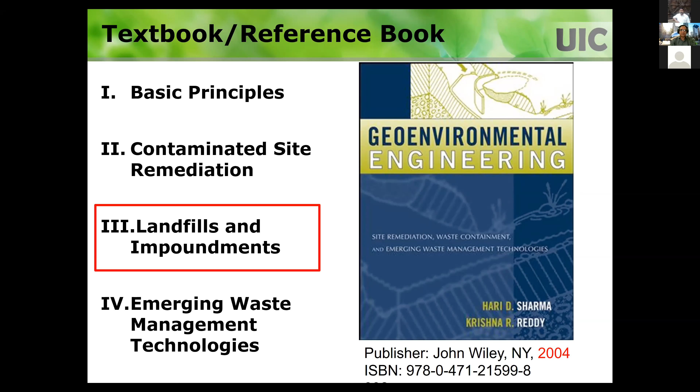Let me start with this textbook or reference book. I recommend everyone working in the landfill area to have this book. It has 4 parts, and the third part deals with landfills and impoundments, covering chapters on sources and characteristics of waste, landfill regulations, siting configurations, liner systems, leachate collection and removal systems, liner design, final cover systems, gas generation and management, groundwater monitoring, surface impoundments, beneficial use recycling, end use of closed landfills, and bioreactor landfills. These topics follow a logical sequence of how landfill design has to be conducted. I teach a graduate level class on design of landfills and impoundments, and I follow these chapters in the same order shown here. If you're interested in teaching a course, I recommend following this structure.

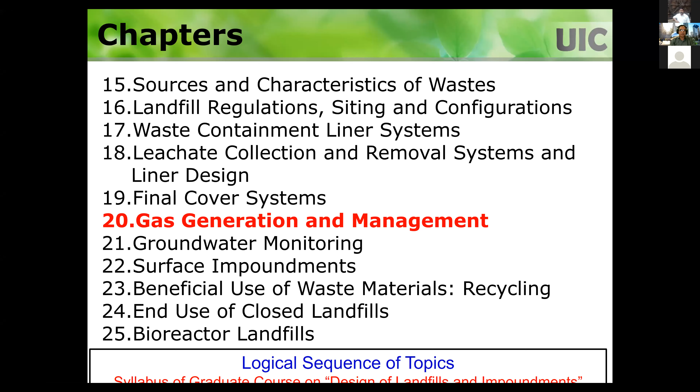In this lecture, I'm covering one particular topic: gas generation and management. If you want more details later, you can refer to chapter 20 in the book on landfill gas generation. So that's the topic today.

So why would gas get generated in a landfill? That's the basic question. Gas is generated because of the degradation of organic matter, the organic components in your waste. If you don't have organics, generally if you have inorganic waste, you don't see any gases generating. But since municipal solid waste contains organics, you're going to generate gas. This happens due to several mechanisms: evaporation and volatilization, chemical reactions, and biological decomposition. Of these three mechanisms, biological decomposition is the most dominant mechanism by which landfill gas is generated.

One has to understand what organic components are in municipal solid waste, because that dictates how much gas you're going to generate and at what rate. So you need a proper understanding of organic components in your MSW. For example, in the US, there's a lot of information from US EPA showing the composition of municipal solid waste—all the different components. You can look at the degradable components: paper, food, yard trimmings, wood to some extent, and plastics to some extent. If you sum them up, that gives you the organic content that has the potential to degrade.

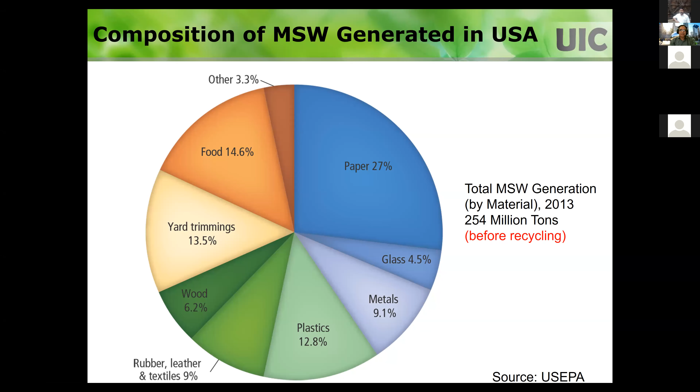But this is the municipal solid waste generated before even recycling. Once it's generated, you do recycling, composting, and take out waste for different management purposes. What we're concerned with, in the case of landfills, is the composition of the waste that is actually going to the landfill. That's the most important thing to look at—it's not about the MSW that is generated, but the MSW that actually gets to the landfill.

So the best way to know the composition of municipal solid waste going to the landfill is to do an investigation. You can collect a sample of fresh waste coming to the landfill to be disposed of. And if you want to know the composition at different locations and depths, you can drill and collect samples at various locations to look at the composition. We did this kind of investigation in our past research projects—this is a project you can see in the picture, done in 2006, many years ago.

This was done at Orchard Hills Bioreactor Landfill. It's really close to Chicago.

We went to a landfill and got samples of the fresh waste coming to the landfill, and then we drilled at different locations at different depths and collected samples, as you see in these pictures. This waste has been at some of these locations for some time. We wanted to know what the fresh waste composition is, and what the waste composition is at different locations and different depths.

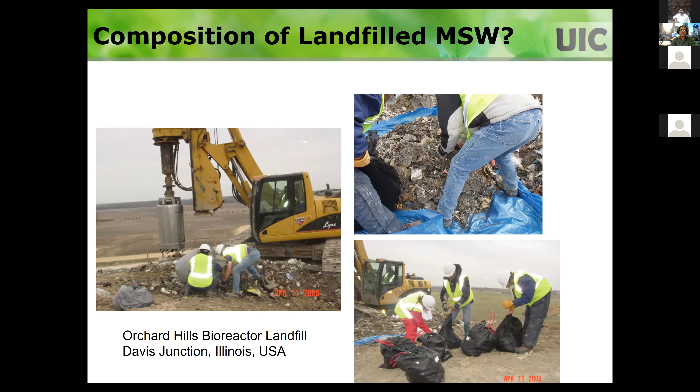So the collected waste, we wanted to know the composition of it. At each location we get a lot of bags of samples, because you need a large amount of material to represent the municipal solid waste. It's not like soil, it's highly heterogeneous. So you get a lot of sample, spread it on the tarp, quarter it, mix it, homogenize it, and take a quarter of the sample.

Then we use sieves, because we want to know the size distribution—not a typical soil grain size distribution, but three big size sieves. We put them on top, and whatever is larger than that size retains on that one, finer goes into the second one, and then the third one. So there are three sieves.

The idea is we look at what is retained on each sieve, and look at each component in it. We have 18 different categories of components, with boxes set aside with labels. We literally look at each piece, figure out what it is—let's say it's plastic or glass—and put it in the corresponding bucket.

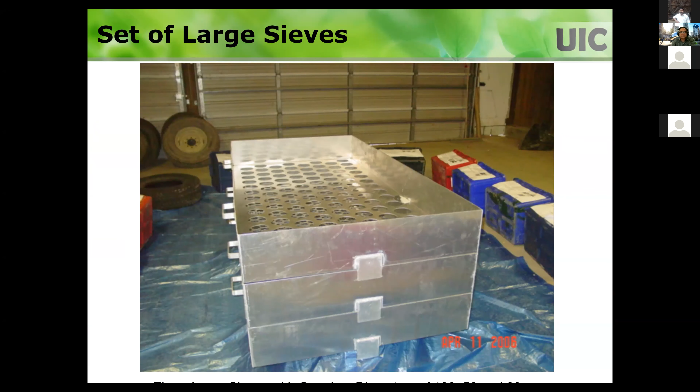So these are the three sieves. This is the large size, with openings of 100 millimeters, 50 millimeters, and 20 millimeters.

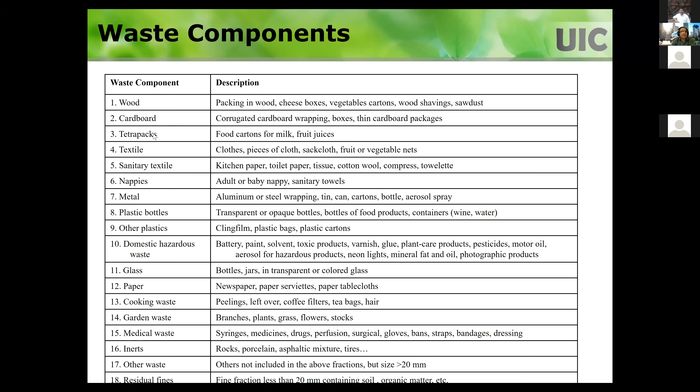These are the different waste categories, the waste components we designated—18 different components, each with a bit of description of what they are. We literally look at each piece in the sieve and put it into the 18 small buckets on the side.

After you do that, you can do different calculations—distributions, total quantities, and all those things.

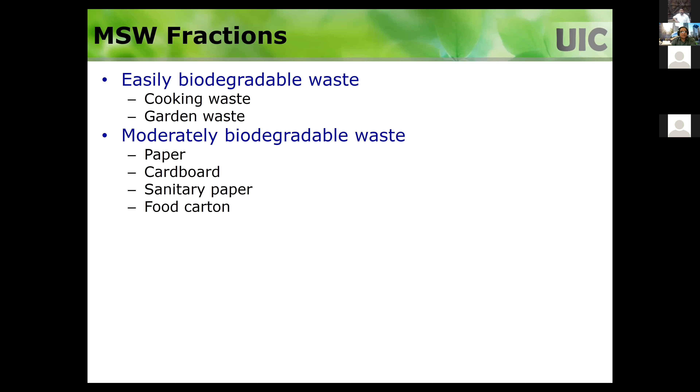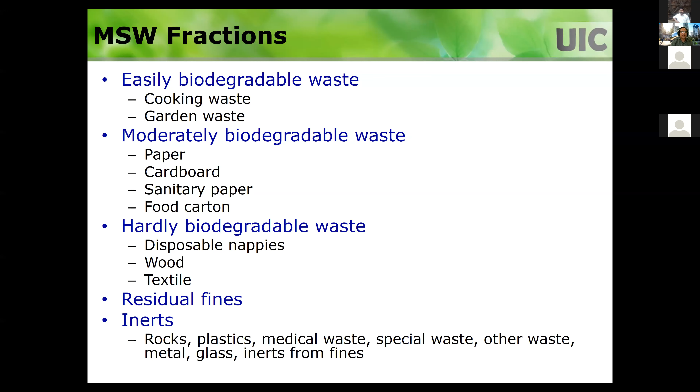For degradation purposes, remember, gas generation depends on how much your degradable fraction is. Not only that, you want to know how easily that organic material can be degraded. So we categorize these components into easily biodegradable waste—like cooking waste, garden waste, and these four components—moderately biodegradable waste, and hardly or difficult to biodegrade, which are three other components. Then we have residual fines, where you can't really distinguish different components, and inert materials. These are the ways you group components to look at the degradability of the waste, and as a result how much gas you're going to generate.

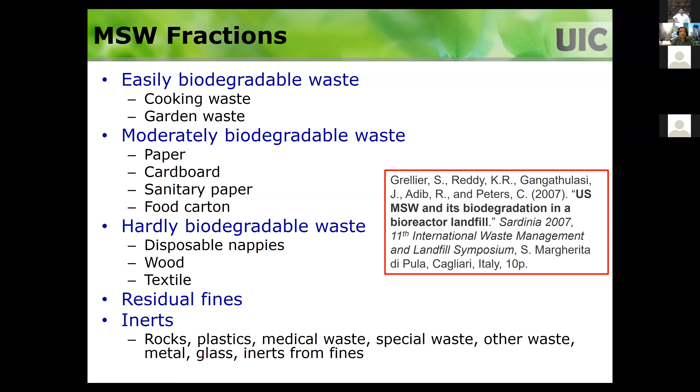So you can plot this—this is the paper that describes how we did this, and the results are also shown in it. Let's look at how the results look for fresh waste.

So this is the waste that came to the landfill for fresh disposal, right? It came for disposal. So when you do this analysis, you can look at how much is the...

Easily degradable fraction is only 6.9%. Moderately biodegradable fraction is 24.6%, and very difficult to degrade is 19.3%. Then you have inerts at 31%, and the residual fines, as I said, that could be degradable or maybe not, it's hard to know, but it's 18%. So you can see 31% is definitely inerts. This is all the other organic fraction that you're going to have in the waste.

Now, in terms of gas generation, you should know that this 6.9% is going to degrade very quickly, and that gas is going to come up. Then this moderately biodegradable fraction is going to start degrading, so that's going to take time. And then this difficult to biodegrade waste, that's going to take a longer time. So even though you have these different organic fractions in the waste, gas generation is a slow process because of these different biodegradable characteristic components.

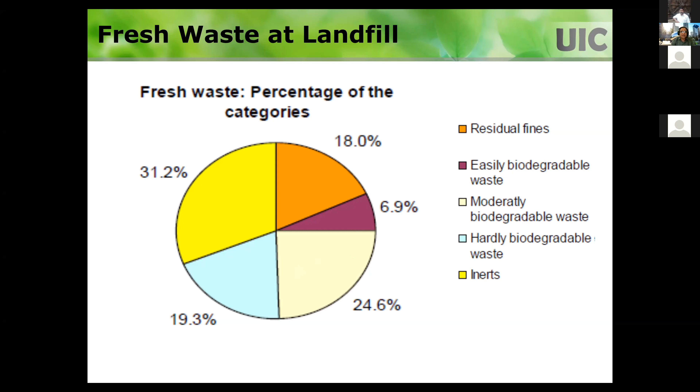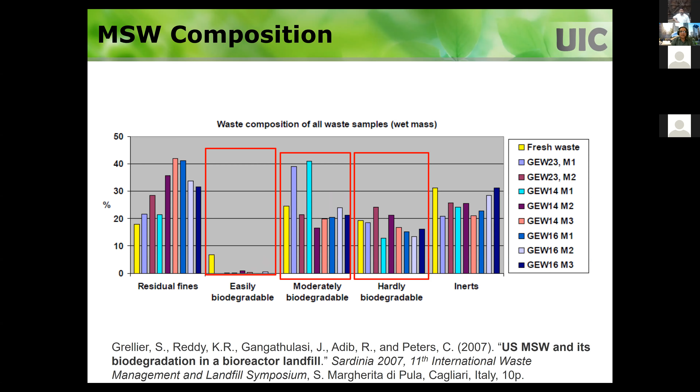But this easily biodegradable fraction, as you see initially how much you have, that's yellow, and the samples we collected from the landfill were there for a couple of years. So you can see everything got biodegraded. And then eventually this moderately biodegradable fraction is going to degrade. This is the landfill undergoing degradation, so it will take a long time for these moderately and hardly biodegradable fractions to degrade.

So a lot of times what happens is, if we conventionally look at loss on ignition as organic matter, you basically burn the waste at a certain higher temperature to burn off the organics. If you do that, you get whatever is the total percentage loss on ignition, but that's not going to give you a lot of detailed information.

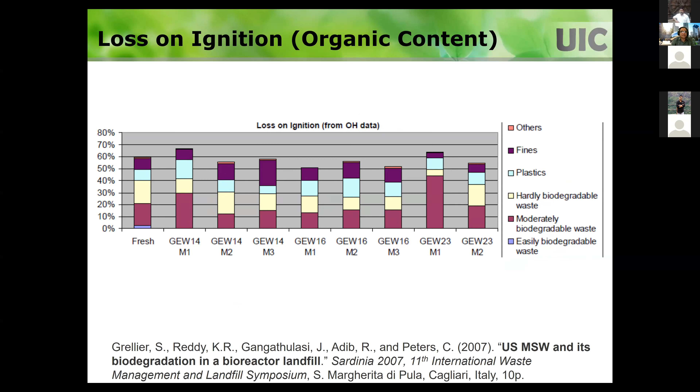So as you see here, subdividing that into easily biodegradable fraction, moderately biodegradable fraction, difficult to degrade fraction, plastics and fines, that gives you, even though you may have organics up to 60%, how much can be easily degraded, and how much is going to be difficult to degrade and takes time. So these kinds of analysis can help you.

So a lot of times, if you want to look at waste samples from a characteristics point of view, you need to have moisture content and loss on ignition. The one thing that geotechs don't commonly do is biochemical methane potential testing. It's very important to do this testing to determine the BMP, because that's the maximum methane potential, how many milliliters of methane you can get per gram of waste. That's very important if you want to understand the extent of gas that came out or has the potential to still evolve.

So those are the things, and you have percentage of fines, moisture content, and temperature. Those are things that you look at. So I'm showing here the fresh waste. As you see, this is the moisture content, and the yellow is the loss on ignition, this organic content you see. And then BMP is shown here, about 120 or 130 milliliters of methane per gram of waste. So that's the potential it has.

And then, when you have collected a waste sample from a landfill, you look at it and compare it with what the fresh waste is. This is the moisture content, so there's less moisture content compared to the fresh waste. And this yellow is the important thing, loss on ignition, you can see it's reduced. The most important thing is the BMP, you can see the BMP is very low. That means a lot of waste at this location got degraded. And then you can look at temperature and other things.

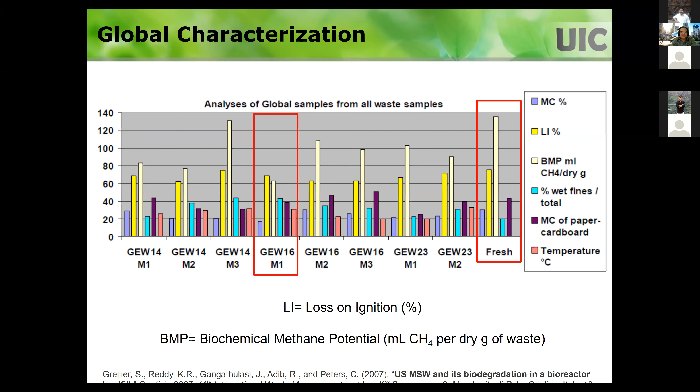So you can do a lot of detailed analysis on the waste samples to understand the gas generation in the landfill. As I mentioned, the mechanisms for gas generation are mostly biological decomposition.

Biological decomposition happens because you have bacteria that is naturally present in the waste, that can degrade the contamination, degrade the waste organic fraction, and that's how the waste degrades.

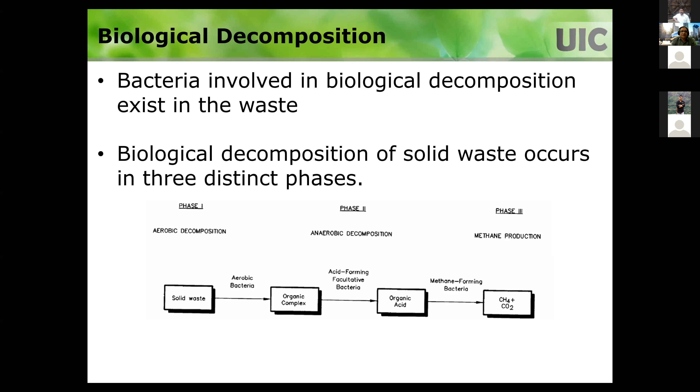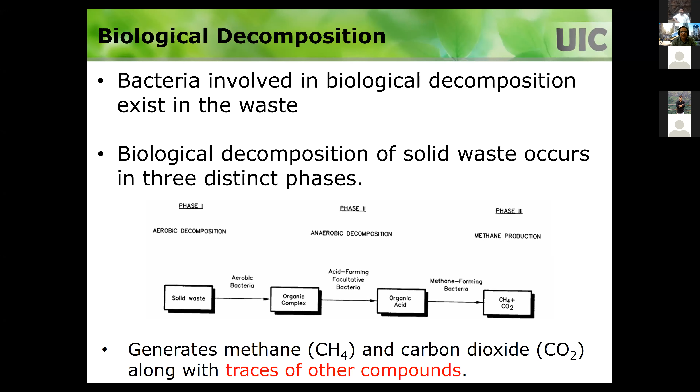Depending upon the literature, you will see there are 5 phases, 6 phases, but predominantly there are 3 phases. Initially you have aerobic decomposition, then anaerobic decomposition, and the third is methane production. There's a lot of literature on the degradation of municipal solid waste. Eventually, in phase 3, you generate methane and carbon dioxide in almost equal amounts, and you could also have trace amounts of other gaseous compounds.

So you will see charts like this one: phase 1 where you have aerobic degradation, then phase 2 and phase 3. I'm not going to spend too much time on this one. There's a more detailed description about these 3 different phases in the textbook, chapter 20.

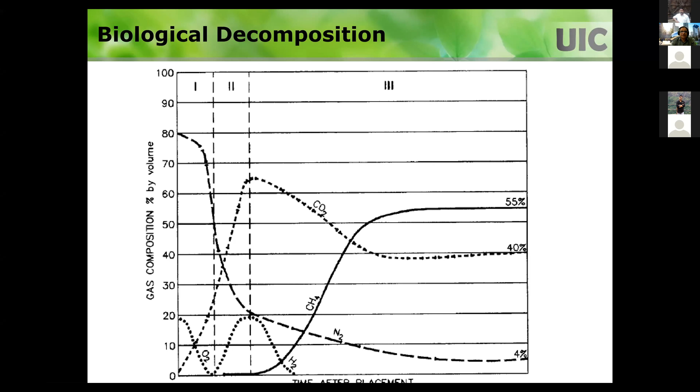Eventually, the first phase and the second phase happen really fast, and the third phase is going to continue for several years. The third phase is the one where methane, carbon dioxide, and other non-methane organic compounds are going to be present in the gas.

The factors that affect gas generation are the composition and age of the waste. If you have fresh waste, you're going to get a lot of gas, but if it's been in the landfill for a while, it has already produced some gas, so it may have a lower gas generation rate. In the composition analysis, if you have already exhausted the easily degradable fraction and the moderately degradable fraction, then you have a difficult-to-degrade fraction that's going to happen very slowly.

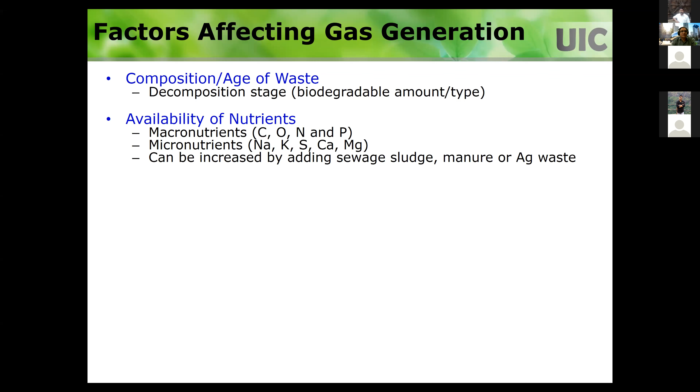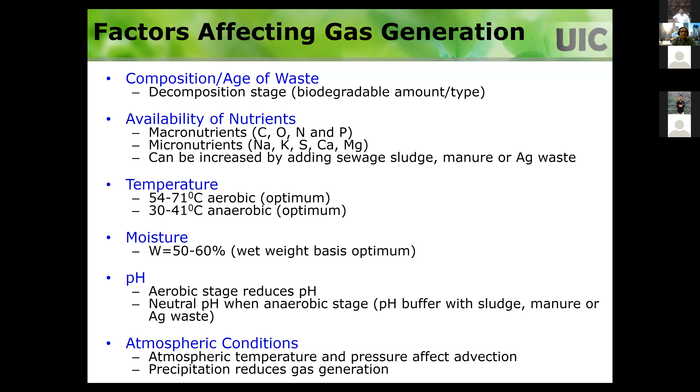When talking about biodegradation, those microbes should have sufficient nutrients. Also, the microbes should have optimal temperature, optimum moisture content, optimum pH, and optimal atmospheric conditions. That's why biodegradation and gas evolution really vary from location to location in a landfill because of these varying environmental conditions. So it's very important to control these conditions to favor degradation if you are hoping to get good degradation.

One thing we want to know about landfill gas, when dealing with landfill gases, is what is the gas composition and what is the gas production rate I'm going to get. So how much gas I'm going to produce, and what is the composition of it.

The best and most accurate way to know the specific gas composition is to install borehole probes, gas monitoring probes, or gas extraction wells in a landfill. Then you basically collect the gas sample and analyze the gas. That's the best scenario that you have.

So that's what a lot of people do. One second.

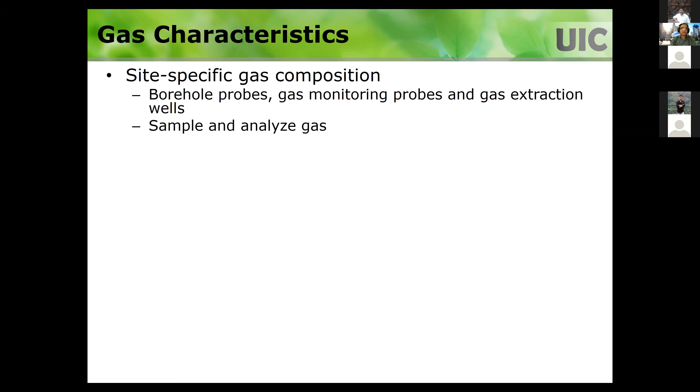So that's the best way, right? You just drill a hole, collect the sample, and then analyze it. When you analyze it, you are going to basically analyze for methane and carbon dioxide, because those are the dominant...

...byproducts of anaerobic degradation. One thing that is becoming extremely important these days is non-methane organic compounds. These have a huge potential for air pollution and could have huge health impacts. Also the physical characteristics of the gas that you generate are important. These are all things that you can determine once you get your sample.

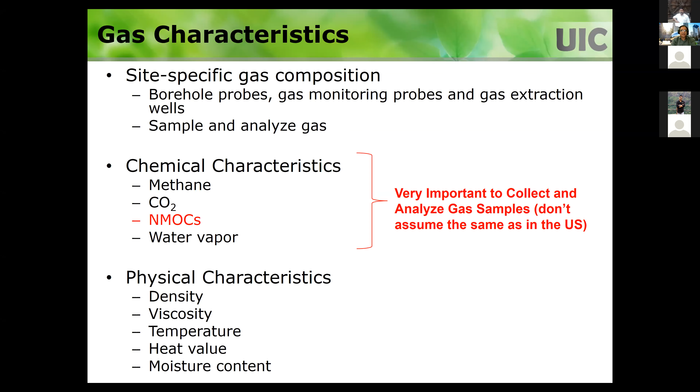So these chemical characteristics are very important, and you cannot assume based on the literature. For example, if we see the gas composition in U.S. landfills, you cannot assume the same composition in Indian landfills, because the basic composition of the waste is different. These non-methane organic compounds really depend upon the waste composition. They are in small quantities, but they could have huge health impacts. So it's very important to collect gas samples and look at the composition in the location where you are.

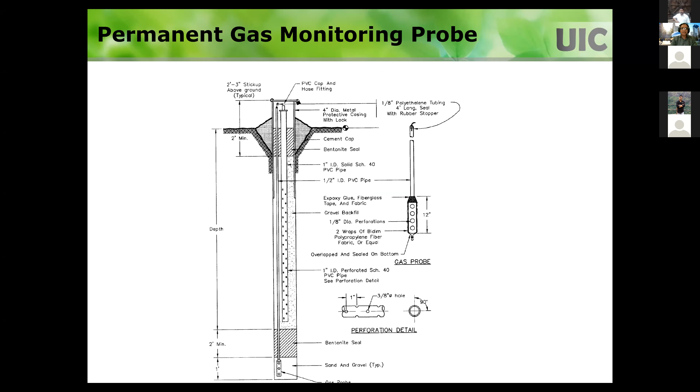And that's how you get the gas composition. The exact chemical composition, how much is the methane concentration, how much is the carbon dioxide concentration, and you could have H2S or other organic compounds. How much are the concentrations, you can find that out.

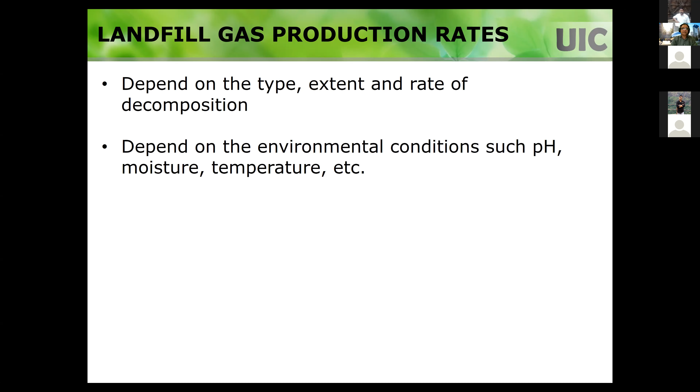But the other thing we want to know is the gas production. How much gas am I producing? That depends upon the type, extent, and rate of decomposition, and the environmental conditions I mentioned. So the best way to know how much gas production there is, is to measure at the extraction wells. You put a flow meter and measure it. That's the most exact way of doing it, and a lot of times at the gas extraction wells they do measure what the flow rate is.

Based on information from US landfills, it's 15,000 cubic feet per ton of waste, with 54% methane, 46% CO2, and trace amounts of non-methane organic compounds. Don't take that as a universal number, but that's the typical range you're looking at.

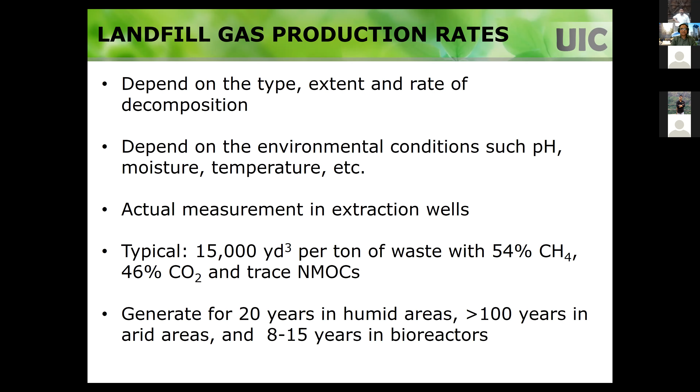That's the production you could have, but how long it's going to take to generate—it could be 20 years in humid areas, more than 100 years in very dry areas, and 8 to 15 years in bioreactor landfills where you adjust the moisture content and so forth. So this is general information that gives you an idea about the production.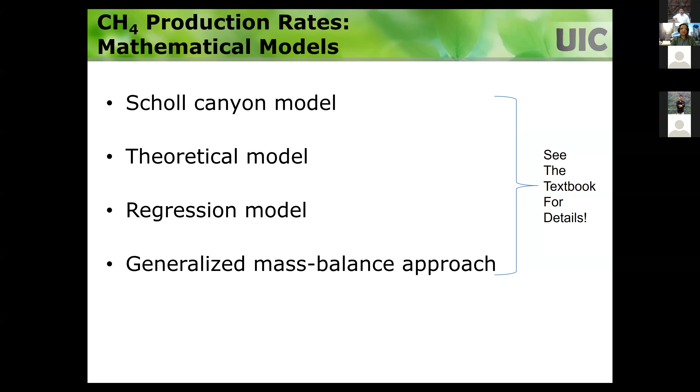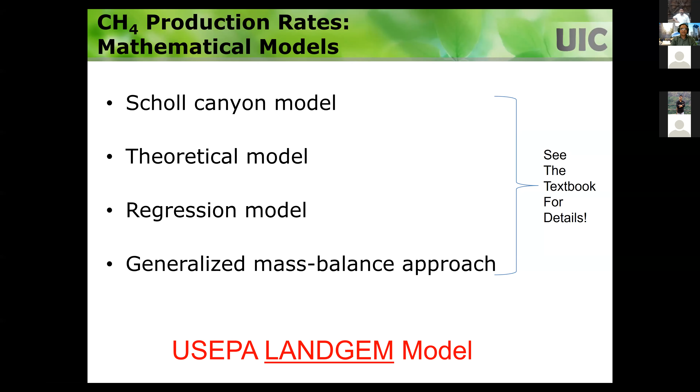You can also use methane production rate prediction mathematical models. These are different models that people have used in practice—you can take a look at these models in my textbook. There's also the US EPA LandGEM model, an Excel-based simple model that can also be used to predict methane gas production. From there, you can infer what the total landfill gas production is.

So we looked at concentration and landfill gas production. We know these things are going to happen, and they're not going to happen suddenly—it takes a longer time for the gas to evolve, and the composition could change with time. So then the question is, why do we need to worry about these landfill gases?

We need to worry because methane is a major component of landfill gas, and it's highly combustible. There's a risk of explosion and fires as a result of the methane—you see landfills catch on fire because of this issue. Also, methane is odorless; you don't smell anything, but it's bad for humans and animals from a health point of view.

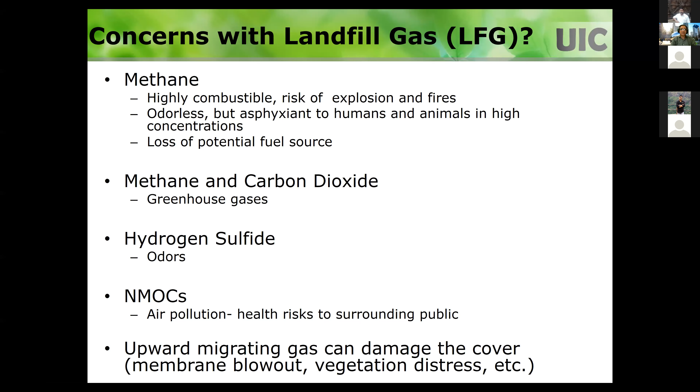The other problem is, if you don't deal with landfill gas, what happens? It tries to come up towards the surface, and even if you put a cover on it, the gas accumulates under the cover and builds up pressure. With that pressure, the cover may blow out, or if the cover has vegetation, it could distress the roots and the vegetation could be damaged. So these things are not acceptable.

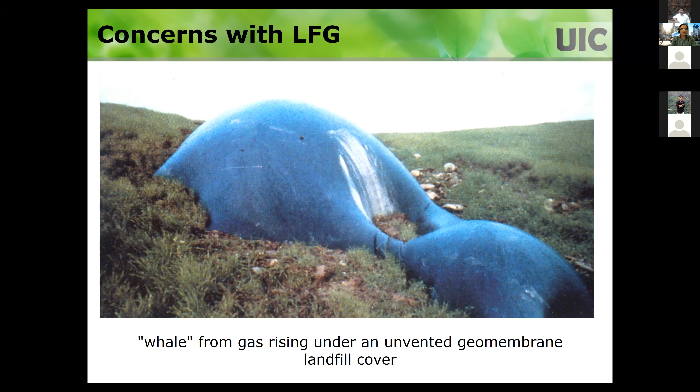Because of all these problems, we really need to do something about it. It's not only that we feel it's good to do something, but regulations actually require us to. As I mentioned in yesterday's lecture, regulations are like building codes, requirements that landfill operators and owners must follow. It's not optional. So RCRA in the US, the Resource Conservation and Recovery Act, as I mentioned in my last lecture, has regulations on methane concentration.

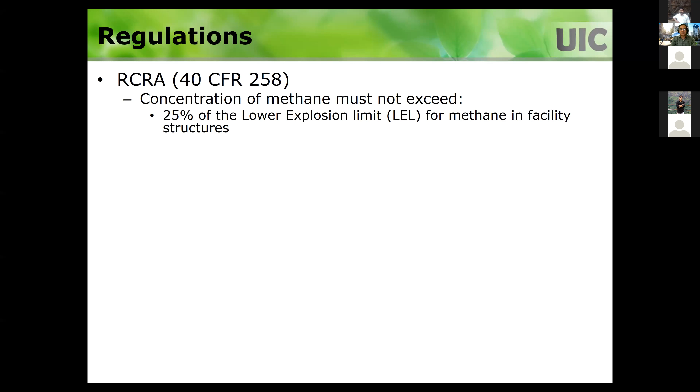You cannot have 25% of the lower explosion limit in any facility structures. And at the facility boundary, at the landfill boundary, you cannot have more than the LEL. For methane, the LEL is 5%. So you cannot have more than 5% methane gas concentration at the boundary of your landfill.

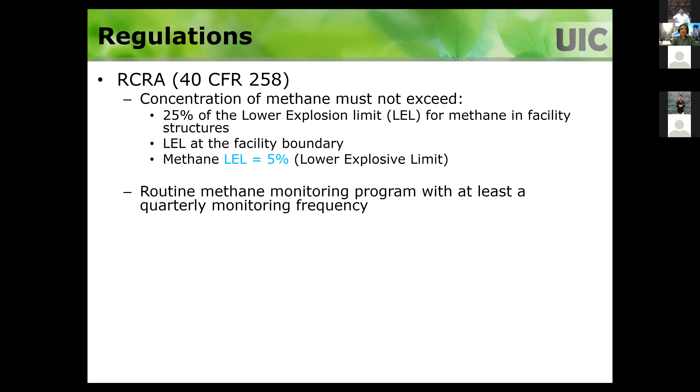Because of that, you need to really monitor the methane concentrations throughout the landfill and make sure that at the boundary you're not exceeding this allowable limit. If you exceed it, you are violating the law and you are punishable. There's a strict punishment for that, which requires you to monitor it and capture the gas.

The Clean Air Act also kicks in because it does not permit all these air pollutants going into the atmosphere. That's a big concern too. Because of that, you need to control these NMOCs.

You could also have additional state laws and regulations that need to be considered too. Generally those are stricter than the federal laws, like RCRA or the Clean Air Act. So you have to do something. There's nothing like, oh, it's good to do something, I'm going to do something. No, if you have a landfill, you are required to do these things.

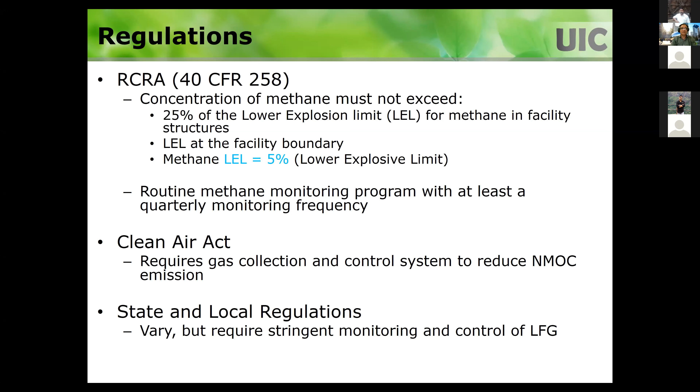As a result, you need to think about capturing or controlling the gases. As I mentioned in yesterday's lecture, India has the Solid Waste Rules of 2016, and section F deals with ambient air quality monitoring at landfills. They clearly state that landfill gas control systems, including the gas collection system, shall be installed at landfills to minimize odor and all these problems that I mentioned.

They also have the same criteria as the US, 25% of the lower explosive limit, which should not be exceeded at the landfill site - it looks like anywhere at a landfill. They'll tell you the options for how you can collect it, what you can do, and there are ambient air quality monitoring requirements. So I think the requirements in Indian Solid Waste Rules are similar to US rules.

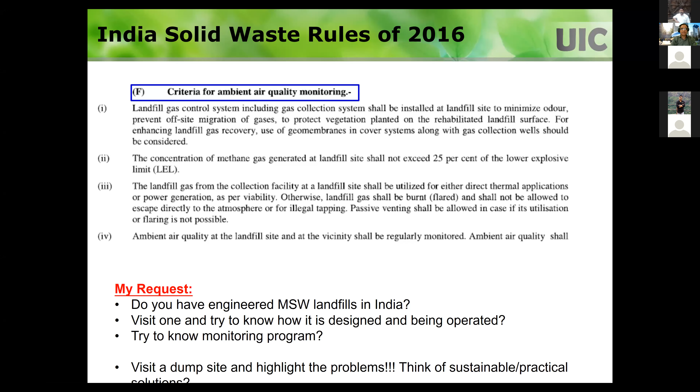My request for you is: do you have any engineered municipal solid waste landfills in India following these rules? Visit one of them and try to learn how they are designed, how they are being operated, and try to know the monitoring program. Now that you know about landfill gases, find out what kind of monitoring they are doing and how they are controlling the gases. And if you don't have an engineered landfill, visit a dump and highlight the problems, and think of sustainable, practical solutions. So if you're assigning a research project for students, these are things you could think about.

So now that we have to do something, basically we need to collect the gases. And as I mentioned, you need to maintain the methane gas concentration below 5% by volume at the landfill property line.

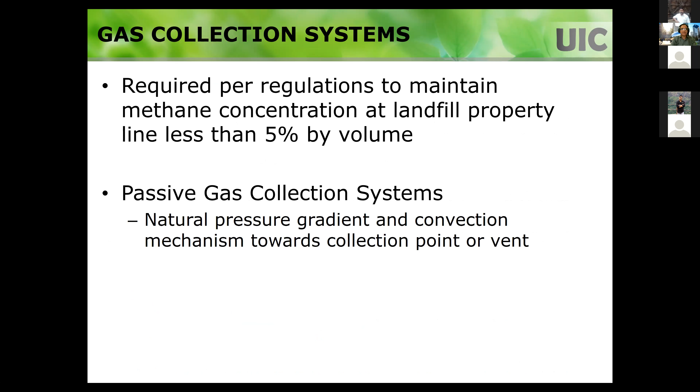Indian solid waste management rules say the entire landfill site needs gas collection. So to collect the gases, we have both passive systems and active systems. Depending upon the situation, you could think about which one to use, or even a combination of these passive and active gas collection systems.

The passive gas collection systems could be passive vertical wells, just like piezometers used in geotechnical characterization to measure water levels. You dig a well, put in a slotted pipe, put a filter pack around it, seal it, and backfill with something. This is in the landfill.

When the landfill gases come in here, this is the final cover. The landfill gases cannot go through the final cover, so they enter into this high permeable filter pack, and from there they come up. Basically, you are venting out into the air.

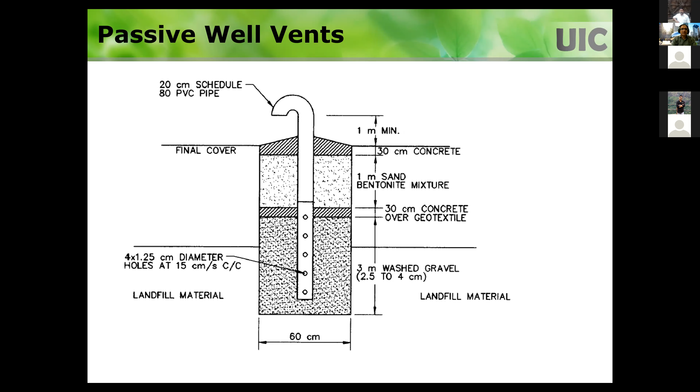You can also put these systems in the cover system itself. If you have a venting layer here, you can have pipes like this, and then vent those out. Basically, you are taking out the gas from the landfill.

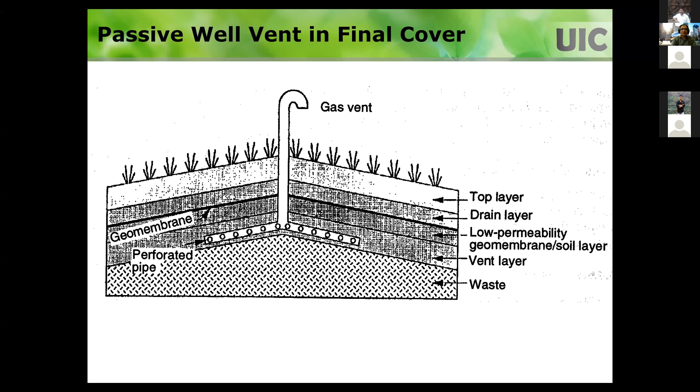If you have a geomembrane in the final cover, you have to be very careful, because let's say you have a barrier layer, a soil layer, and a geomembrane, and then this vent pipe has to come out. The junction where it comes through that geomembrane needs to be sealed properly.

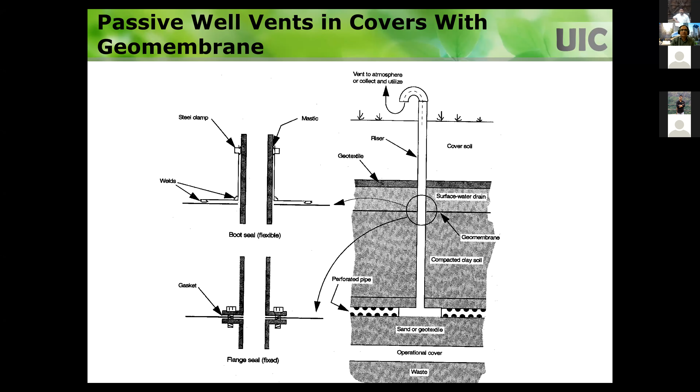Otherwise, it's not going to do that infiltration function, which is the main purpose of putting it there—you're trying to prevent the infiltration of precipitation. So here is the detail about it. The geosynthetics industry people know very well how to address this connection, so you have a dual purpose: you're able to extract the gas, and also prevent infiltration.

Or you could have horizontal trenches. You dig trenches in the waste, and then you have that gas collection pipe, and from there you can vent it.

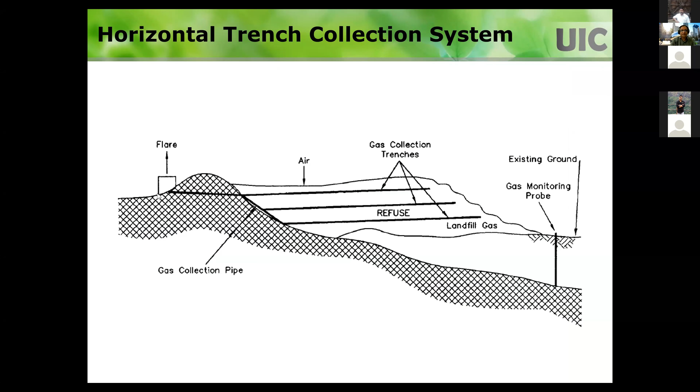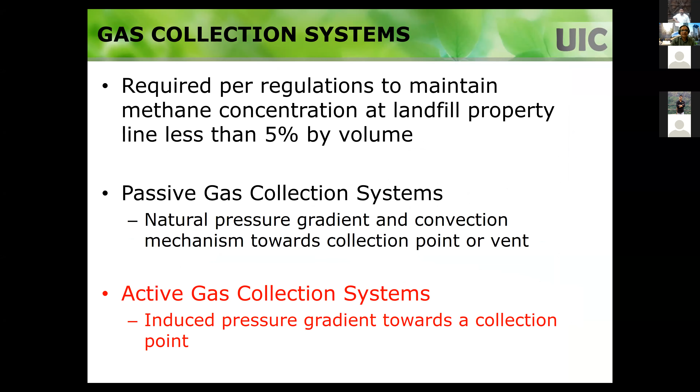You also have an active gas collection system. If you have an existing condition that does not allow gases to be collected in a passive manner, then you have to do active gas collection. Basically, you apply the vacuum to suck up all the gas that is being produced in the waste.

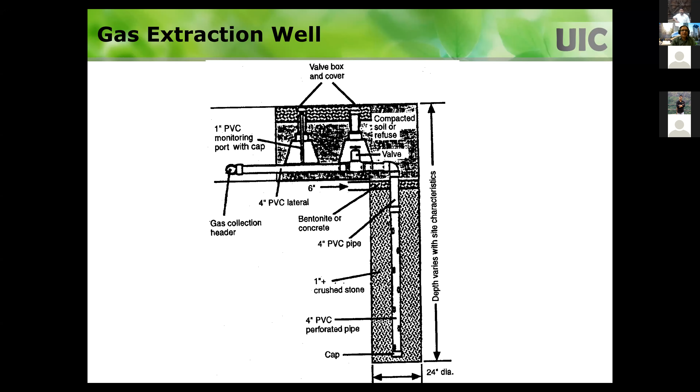It's kind of similar to pumping wells that we use in groundwater fieldwork—slotted pipe, then filter pack, then a header pipe, and the gas is being extracted.

Once you extract the gas, in some places you can literally vent it out, but a lot of places it's not allowed, based on the Clean Air Act. You cannot just vent it into the atmosphere—you really have to treat it.

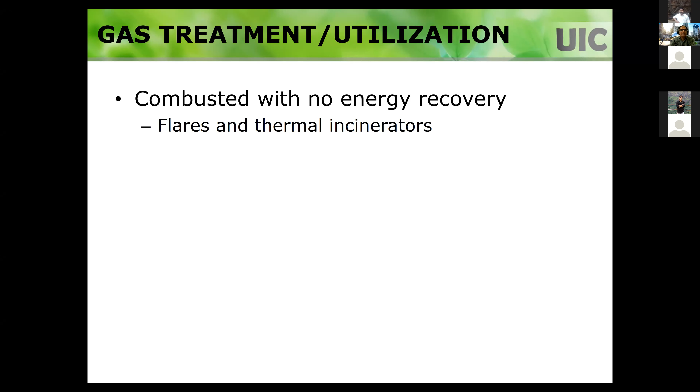There are two ways to treat that gas. One is you just combust it and release it into the atmosphere, so you're not really recovering the energy out of this system—a lot of times we use the flaring system for that. The other is you combust it with energy recovery, which is obviously the best option because you don't want that energy to be wasted.

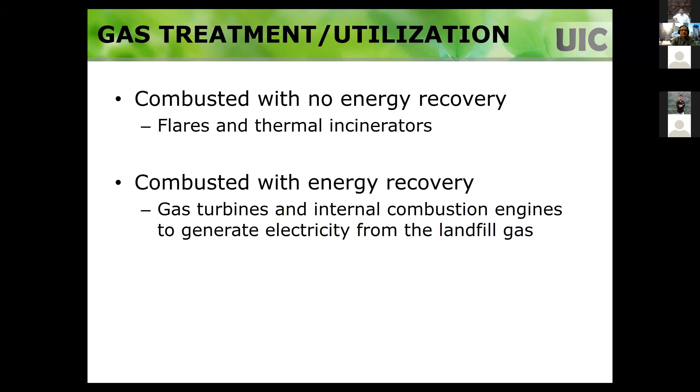You may want to recover the landfill gas, methane, and use it for energy recovery, but it depends on whether energy recovery is financially practical. If not, gas flaring is very commonly done at landfills—basically you are burning the landfill gas as it comes out, at 760 degrees centigrade, to destroy all the gas constituents, and the resultant products can be emitted into the atmosphere. Basically, you're controlling the air emissions.

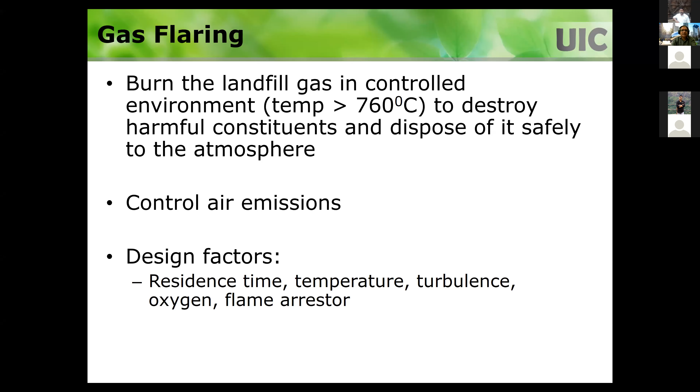In this, you look at residence time, temperature, turbulence, oxygen, and flame arrestor. So those are all the design factors, and you control them so that emissions are safe to put into the atmosphere.

Basically, you have a blower that draws in gas from the landfill. It could be coming from vertical wells, trench systems, or an active extraction system, and then that's diverted into the flare that I've shown here.

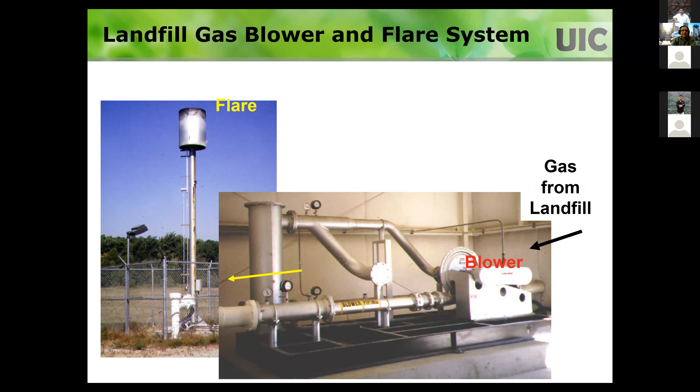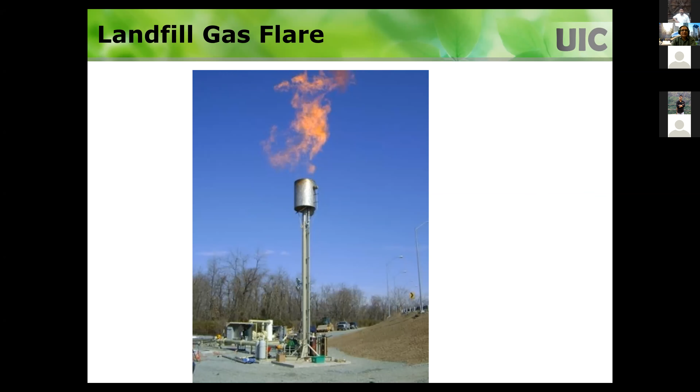If you go to some landfills, especially at night, it's so obvious to see this huge light, the smoke, and fire that comes out from these things.

So the energy recovery is useful. As I mentioned, landfill gas is a good energy source. It's considered 500 BTU per cubic feet of energy versus 1,000 BTU per cubic feet of pipeline gas. So it's preferred for large landfills where you have a lot of gas, and putting the gas to energy projects are feasible.

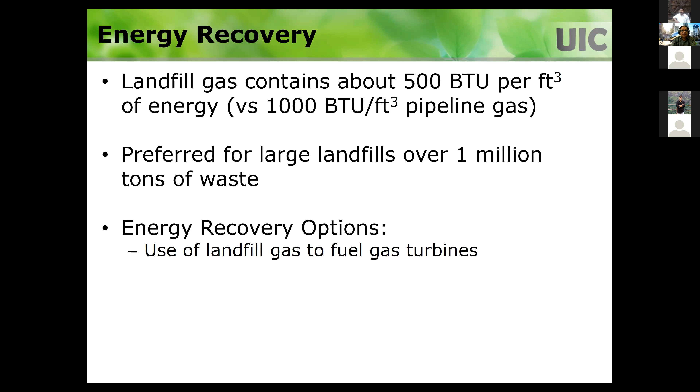Once you extract that landfill gas, you can recover the energy using gas turbines or IC engines, or use it directly as boiler fuel, or you can upgrade the gas quality and inject it into the existing pipeline, which can go into the common utility distribution system. So these are options that are considered.

Obviously, this energy recovery is a good thing to do, because anything that can substitute fossil fuels is great from a climate change point of view. But a lot of times it's the financial viability that makes landfill owners do it or not. A lot of landfills that I visited used to do it when economics worked out. Now they shut down the plants because it costs more to produce this energy compared to buying it. So there should be some financial benefit model to make these energy recovery options available.

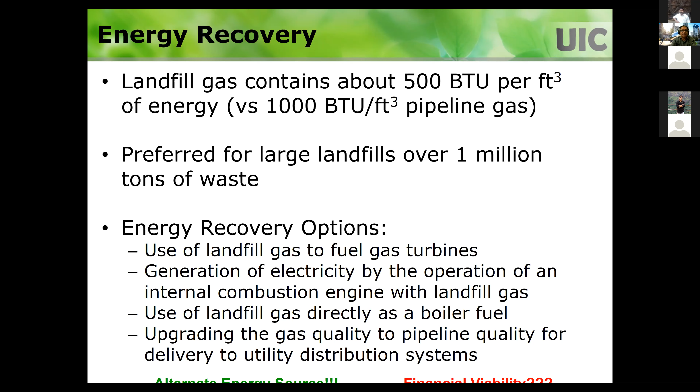But these are the things that we manage. So a lot of things are managed properly, but there is an issue of fugitive emissions.

Let's say you have an active extraction well, so you're trying to suck up the gases. These extraction wells are placed at a certain radius, a certain spacing, and depending upon the vacuum you apply, there will be a radius of influence. All the gas generated within that radius of influence could get sucked up and collected. What about the areas that are beyond this radius of influence?

They tend to try to come to the surface, and even though you have a final cover, they will slowly find a way to come out. So these are the fugitive emissions, and they are substantial at landfills. You cannot put these extraction wells at very small spacing to make this go away.

Even the extraction wells, as I mentioned, are considered 60% efficient, so you have 40% of the gases trying to escape. This has been a major problem in the U.S., and we are trying to address it.

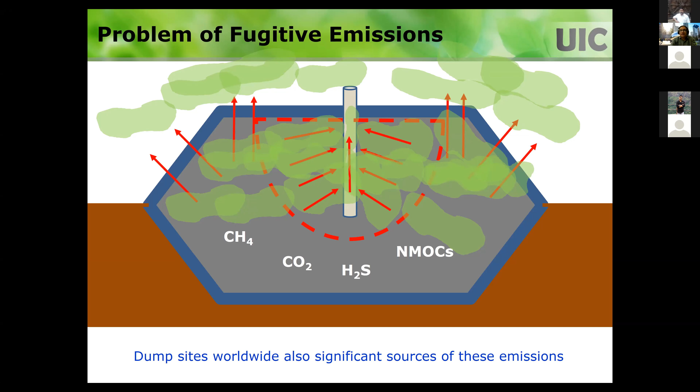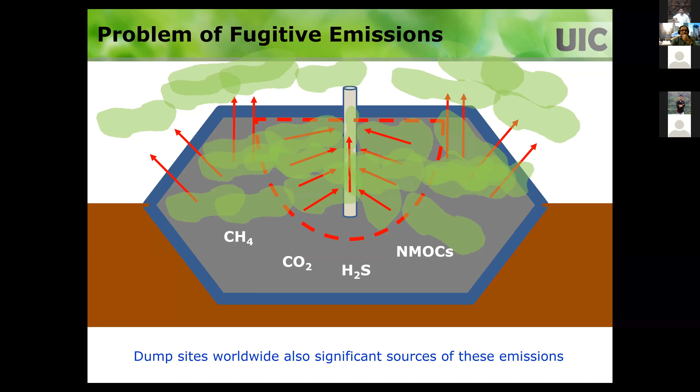If you have a dump site, then everything is emissions going into the atmosphere. I'm talking here about engineered landfills that we have in the US—they are very well engineered, with a very good cover and extraction wells, but still we have these fugitive emissions. If you have open dumps, everything is going to the atmosphere, which is really bad. So the idea is how do you address those fugitive emissions in a passive manner.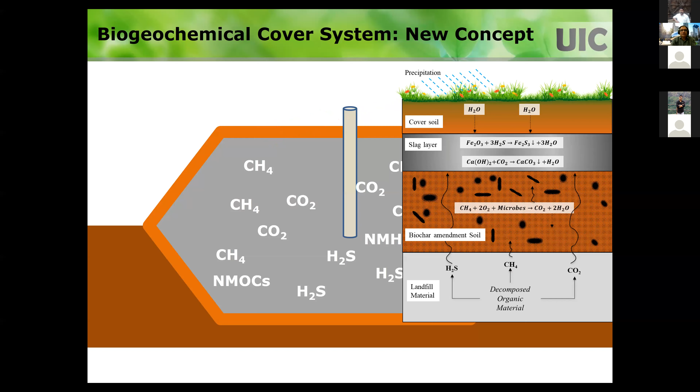Because they will come out slowly, what do you do with this? So what we are doing in our research—just giving you a flavor of one of our ongoing projects—is to think about a cover system a little bit different than the conventional cover system. So what we are looking at here is a cover system.

Let's say you have waste that is generating methane, carbon dioxide, and H2S, and that comes to this soil layer. Typically, we just have a soil layer with some methanotrophs, microbes in there, that convert methane into CO2, but the amount of that conversion is very low. But if you add biochar to that soil, you create nice conditions for methanotrophs to grow and multiply, and then you can get substantial oxidation of the methane into carbon dioxide.

So this we studied for many years, and we established that one. And recently, we tried to look at, okay, we're converting methane into CO2. The CO2 is getting emitted to the atmosphere, and the CO2 that is coming in the landfill gas,

that's untreated, and that's also going into the atmosphere. So can we sequester that CO2? And H2S also is a big problem, so can we sequester the H2S? We found out this slag layer can really do that one. It can sequester the H2S, it can sequester the CO2. So basically, methane is converted into CO2, and CO2 gets sequestered here, H2S gets sequestered here.

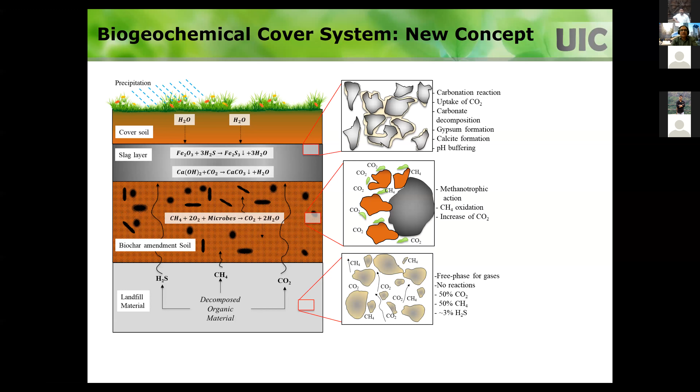So these are the main components. We haven't looked at what happens to the NMOCs, but they could also be addressed in some way in this kind of biogeochemical cover system. So practically, we have zero emissions. We are trying to say that we are developing this zero emission cover system for landfills.

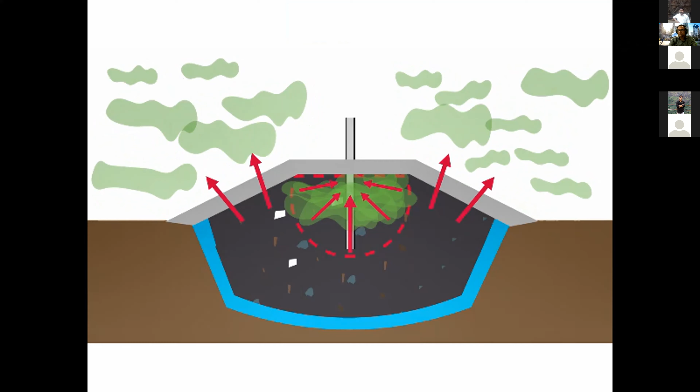However, these systems are not always 100% efficient due to the limited radius of influence of each gas collection well. As a result, the gases escape, making fugitive landfill emissions a major environmental problem. Exacerbating the problem, in many developing countries, landfills do not have gas collection systems. So greenhouse gases are directly emitted into the atmosphere, significantly contributing to global climate change problems.

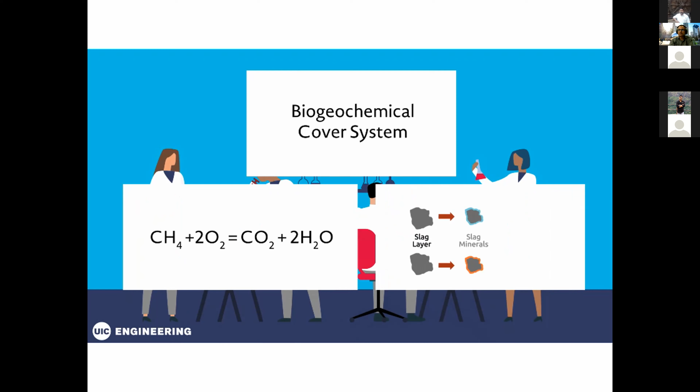In order to mitigate these fugitive landfill emissions, we are developing a biogeochemical cover system, which consists of biochar amended soil and steel slag. Our results show that biochar amended soil has significant potential to mitigate methane by oxidation, and steel slag has the potential to mitigate carbon dioxide and hydrogen sulfide emissions through various carbonation and sulfidation reactions.

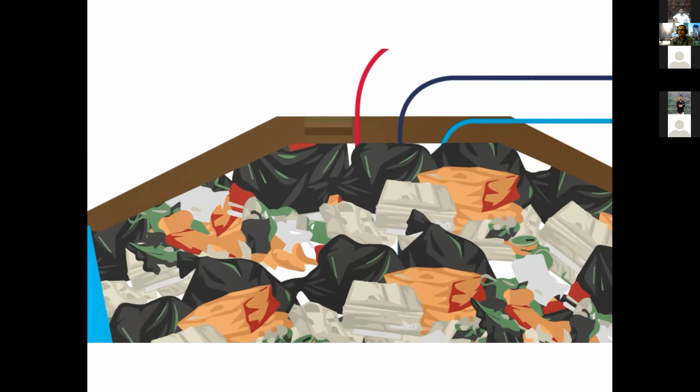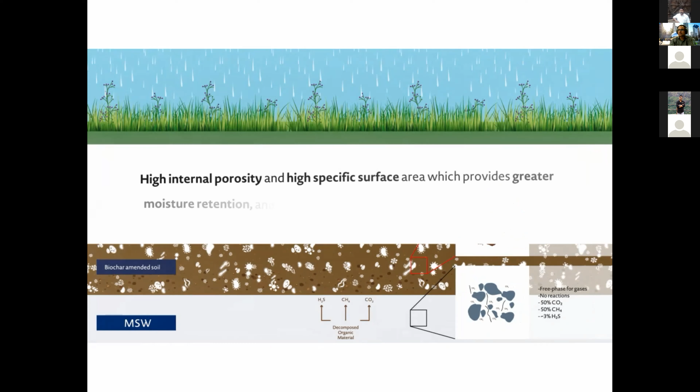Here's how it works. Landfill soils have methane oxidizing bacteria. However, the bacterial activity needs to be enhanced for effective methane oxidation in the soil. Biochar amendment provides a favorable environment for the bacteria to colonize. It has high internal porosity and high specific surface area, which provides greater moisture retention and greater surface area for the microbes to colonize. As a result, biochar amended soil leads to greater methane oxidation.

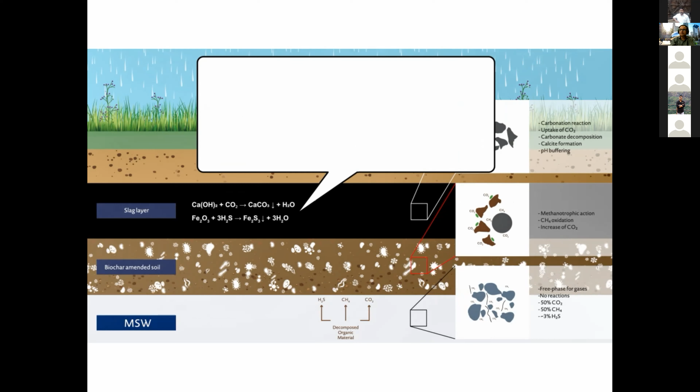Steel slag is produced as a byproduct during the steel manufacturing process. The slag is rich in alkaline metal oxides and iron oxides. Calcium oxide can bind carbon dioxide in the presence of moisture and form calcium carbonate. Similarly, iron oxide can bind hydrogen sulfide in the form of iron sulfide. Through these chemical reactions, the slag sequesters both carbon dioxide and hydrogen sulfide.

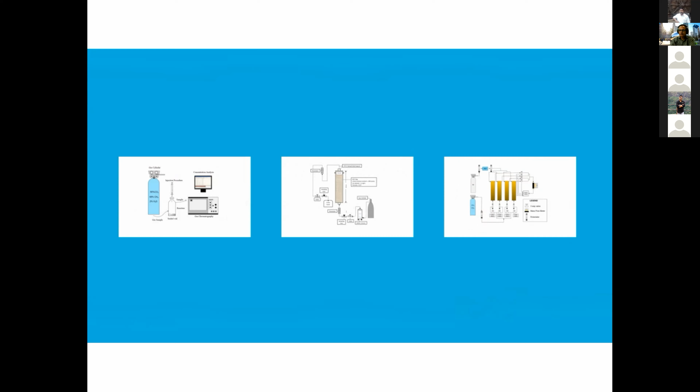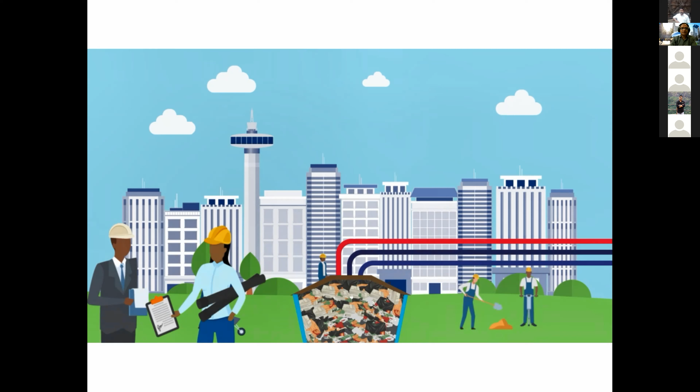We developed findings through small batch tests, small column tests, and near field scale column experiments in our laboratory. Then we performed field test plots to affirm the findings in the real field setting. Our results confirm that by bringing together biochar amended soil and steel slag in a biogeochemical cover system, we can mitigate the fugitive emissions of a landfill. For more information, visit us online.

So hopefully that brief video has given you information about the project we are working on. We published several papers on this, so you can find more technical details on this biogeochemical cover system. It's based on waste materials and is very inexpensive, and it could be put on the dump sites too. So it's an ideal type of cover system that can go in.

And by the way, I think my PhD student Jyoti Chetri has joined. She's working really hard on this project.

So just in closing, I think I'm out of time. I just want to mention that the landfill design, construction, operation, closure, and monitoring methods are well established in the US, and based on the monitoring data for over 30 years, engineered landfills are shown to be protective of public health and the environment.

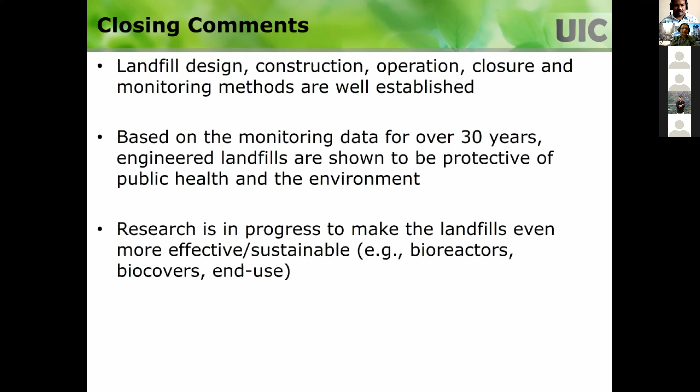Research is in progress to make the landfills even more effective and sustainable. So that's what we are trying to do: working on bioreactor landfills, biocovers, and innovative end uses to make existing landfills more sustainable.

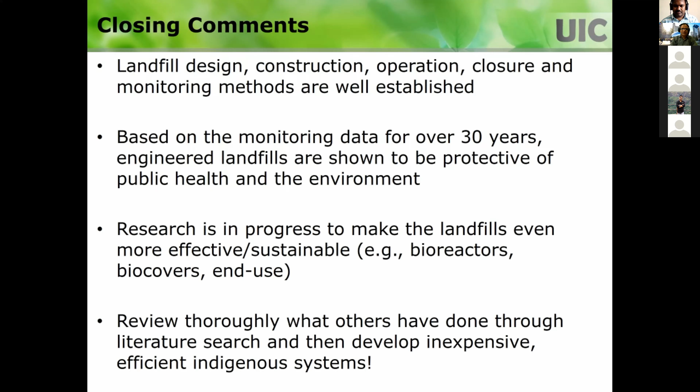I recommend everyone to review thoroughly what others have done through literature search and then develop inexpensive, efficient, indigenous systems. Just because it's done in the US, you don't have to do it in your country. You always have to look at the local conditions and develop local solutions.

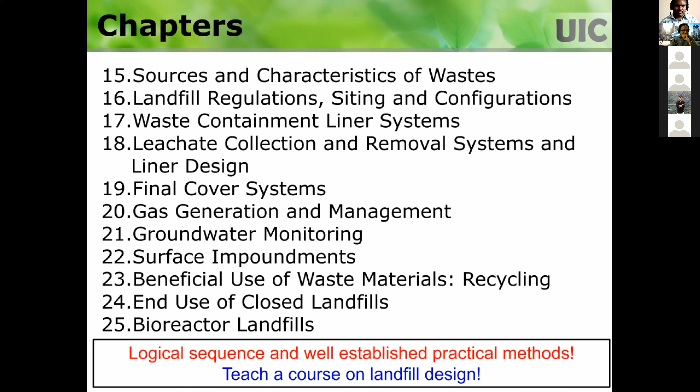So again, I want to end with this textbook, Landfills and Impoundments. I really want you to have hands-on this book, so you have course material to teach a course such as a landfill design course.